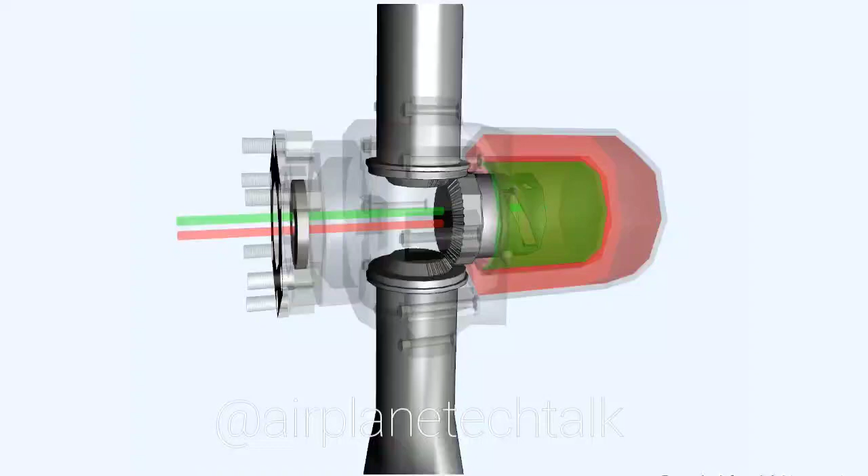One type of double-acting mechanism used on larger propellers, like the one shown here, achieves control of blade pitch angle by means of a hydraulically actuated piston connected to a cam slot, which rotates a bevel gear. The bevel gear engages with and drives other bevel gears located at the butt of each blade. Oil flow to either side of the piston is controlled by a propeller control unit.

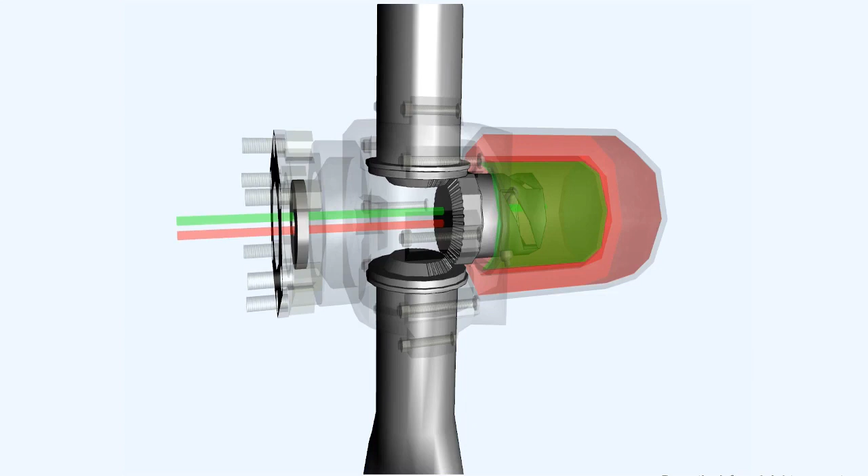Alternatively, the type of control system shown here has a similar pitch change mechanism to the single-acting propeller. Like the single-acting propeller, its pitch change mechanism is also mounted towards the front of the hub, and the cylinder also contains a hydraulic piston. However, in the double-acting system, this piston will have hydraulic pressure directed to either side of it.

Fine pitch oil is sent to one side of the piston, or coarse pitch oil is sent to the other. This eliminates the need for coarse pitch springs or gas pressure, and, with the exception of some larger propellers, the assistance of centrifugal counterweights.

The double-acting propeller's controller will respond to the various demands made by the pilot regarding the propeller RPM to control the oil flow to either side of the piston in the pitch change cylinder in three ways.

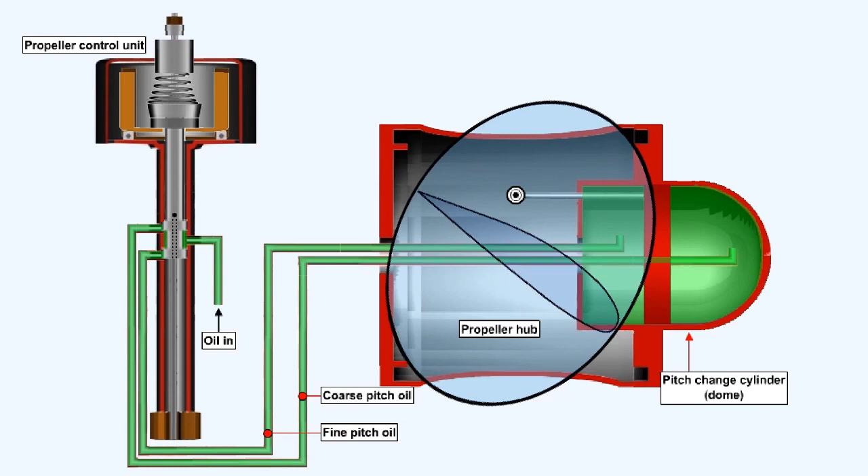If the propeller is underspeeding, then the flyweights will be leaning inwards because of the reduced centrifugal force, allowing the speeder spring to push the pilot valve downwards. This will allow the unit to supply oil to fine off the pitch of the propeller, while simultaneously porting coarse oil to return. The piston will move to fine off the blades, causing an RPM increase.

If the RPM is as required, in other words the propeller is on speed, then a hydraulic lock is formed which traps oil both sides of the piston, maintaining the blade pitch constant.

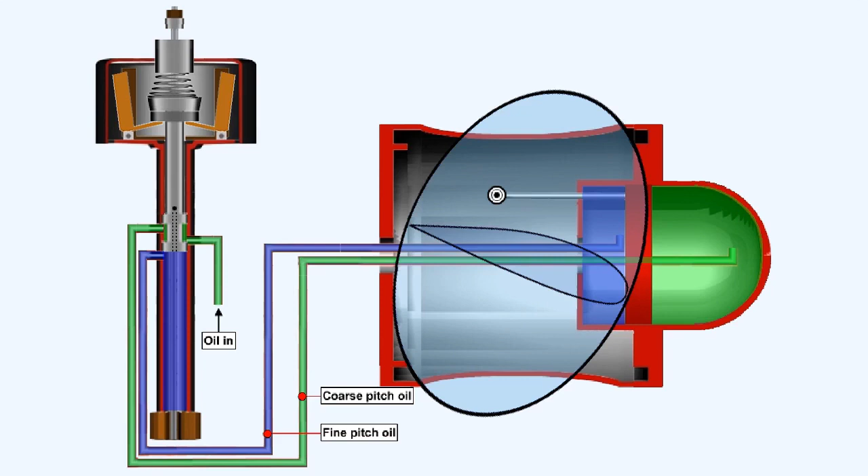If the propeller is overspeeding, then the flyweights will be forced outwards by centrifugal force, compressing the speeder spring and allowing the pilot valve to move upwards. This will simultaneously allow coarse oil to be ported to one side of the piston and fine oil to drain back into the engine from the other side. The piston will move to coarsen the blade pitch, causing a decrease in RPM.

A constant speed propeller must be capable of all the pitch change operations mentioned previously, as they are selected by the pilot moving the RPM lever in the cockpit. The system must also be capable of maintaining a selected RPM within its own operational limits, regardless of changes in airspeed, altitude, and engine power setting.

When the constant speed unit senses that the RPM is as has been selected, the system remains in a static state. However, any change in airspeed, altitude, or engine power setting will result in a tendency to either increase RPM above or decrease RPM below the value selected.

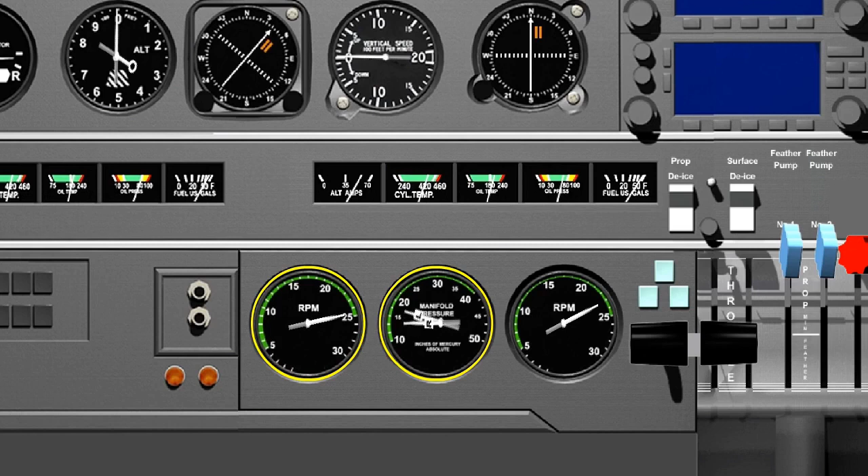As we've seen already, a tendency for RPM to increase, an overspeed condition, will be countered by a supply of oil being fed to the coarse pitch side of the piston in the pitch change mechanism. As is shown in this animation, the pitch will then coarsen and propeller torque will rise as a result of the increase in the blade angle of attack. Propeller torque now exceeds the engine torque and will cause the RPM to decrease back to the selected setting.

As the RPM regains its previously selected value, the movement of the pilot valve in the constant speed unit, which directed the oil flow in the first place, is progressively reversed until it regains the sensitive position, where a hydraulic lock holds the position in the pitch change mechanism immovable until the next RPM selection or disturbance in airspeed, altitude, or engine power setting.

A tendency for the RPM to reduce, which is termed a propeller underspeed condition, must be countered by a supply of oil being fed to the fine pitch side of the piston in the pitch change mechanism.

As shown in this animation, the pitch will fine off and propeller torque will fall as a result of the decrease in the blade angle of attack. Propeller torque is now less than the engine torque and will cause RPM to increase back to the selected setting.

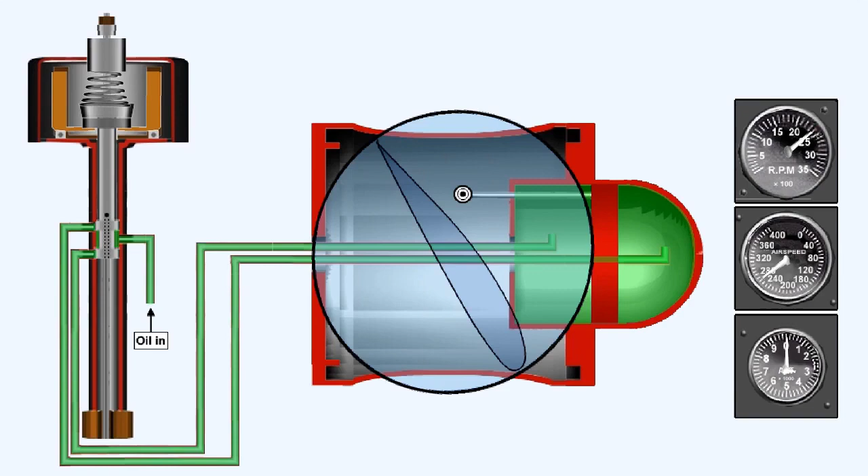Should an engine fail in flight, its propeller control unit would sense a drop in RPM, and, in an attempt to maintain the pilot's selected RPM level, would move to the underspeed or fine pitch position. Centrifugal moments acting on the blade would cause it to rotate towards fine pitch.

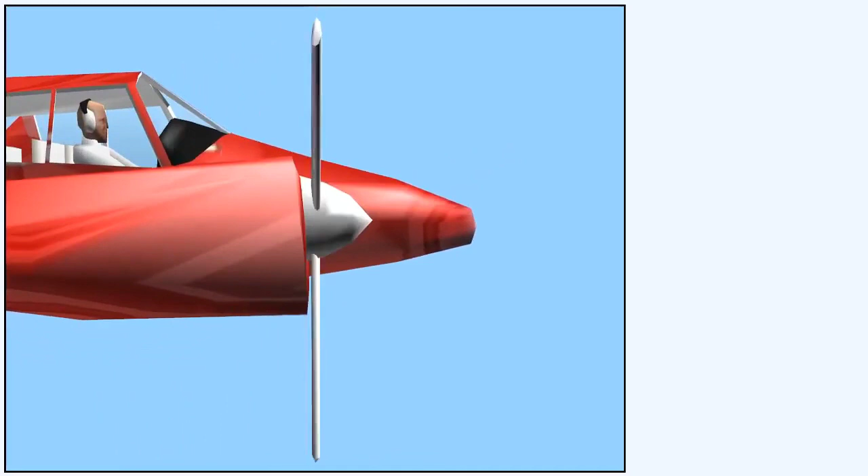This would result in the propeller being put into a windmilling situation, with its pitch change piston abutting the fine pitch stop. The immediate result of this would be a very large asymmetric drag, which would yaw the aircraft violently towards the failed engine.

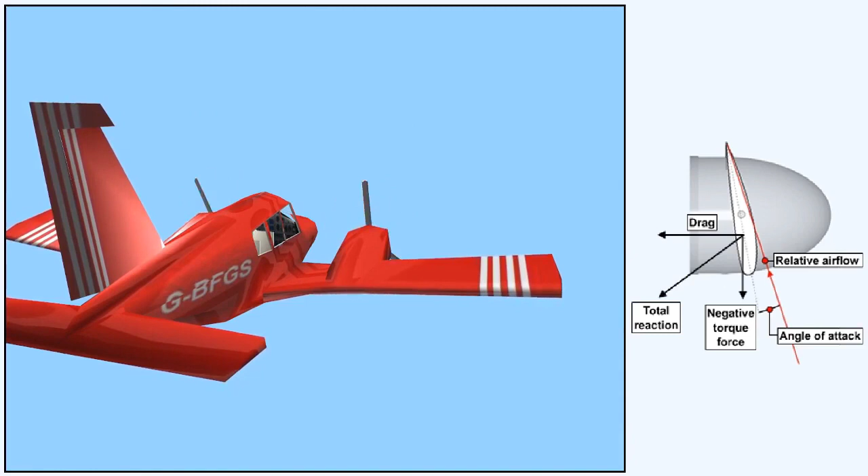A second possibility, if the propeller continued to windmill and drive the engine, could be a complete mechanical breakdown of the engine, and even an engine fire.

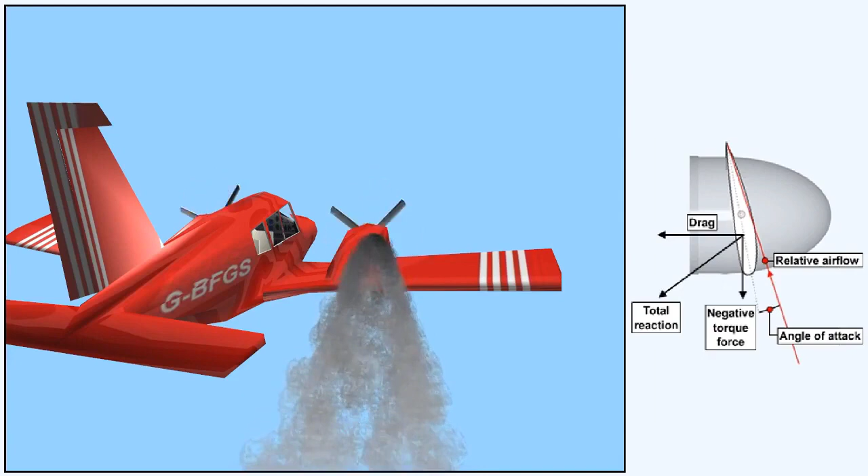So, to minimize drag, and also to prevent further possible damage to the engine and the aircraft, some propellers, particularly on multi-engine aircraft, are provided with a means of turning the blades edge-on to the air flowing over them. In this edge-on position, where no aerodynamic force is generated either forwards or backwards, the propeller will cease to rotate. This action is called feathering the propeller.

If the engine had actually failed, there would be no requirement to unfeather its propeller. However, propeller manufacturers usually provide an unfeathering facility, by means of which, if appropriate, an engine restart may be attempted. This may be a requirement following asymmetric flight practice.

The operating principle of the propeller control unit incorporated in a feathering propeller is similar to that previously discussed, in that the unit contains an oil pump to boost oil pressure delivered from the engine or reduction gearbox, and a hydromechanical governor for RPM control. There is, however, the addition of a feathering mechanism, the operation of which will be discussed progressively throughout the lesson.

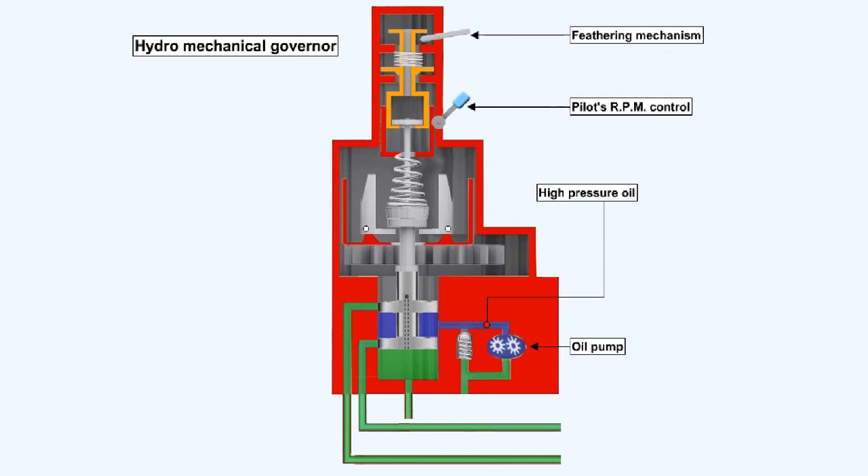Control units with feathering mechanisms may be found on both turboprop or reciprocating aero engines. Dependent on the manufacturer and type of propeller system, the controller may be known as a propeller governor, a constant speed unit, CSU, or a propeller control unit, PCU. For the remainder of this lesson, we'll refer to the unit as the propeller control unit, or PCU.

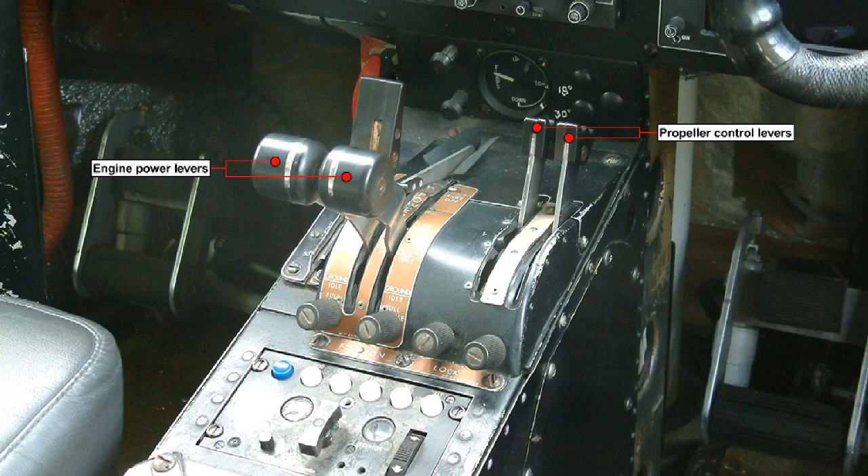The controls available to the pilot are, again, dependent on type. Most spark ignition piston engines, and many turboprop engines, are equipped with a twin-lever cockpit arrangement, whereby the pilot has separate engine power and propeller control levers. In this arrangement, propeller feathering can be manually achieved by moving the propeller control lever to the feather position, or on some aircraft, by means of a separate feather lever.

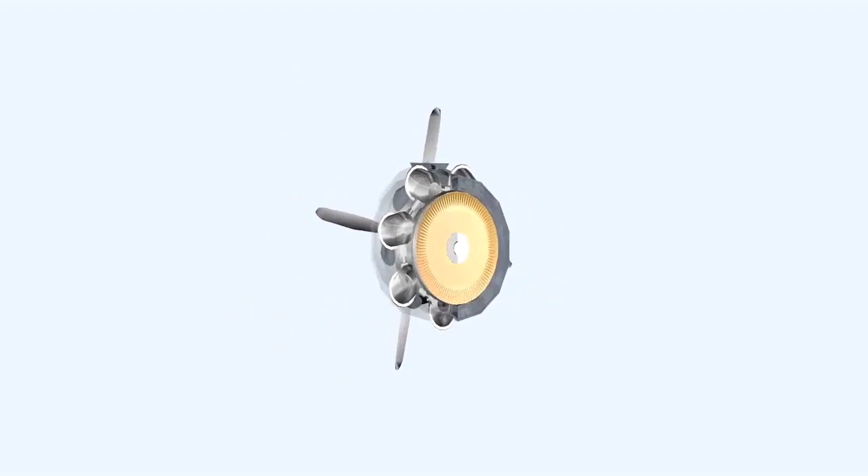Some turboprop engines utilize a single lever arrangement, whereby the pilot is provided with a power lever only. In this arrangement, propeller pitch, RPM, and engine fuel flow, power, are simultaneously adjusted. Feathering may be achieved by moving the engine high-pressure fuel cock to the feather position.

New generation reciprocating engines equipped with Full Authority Digital Engine Control, or FADEC, also use a single lever arrangement, whereby the pilot selects the required power setting and the propeller pitch angle is controlled either electronically by an electronic engine control unit or by a hydromechanical control unit.

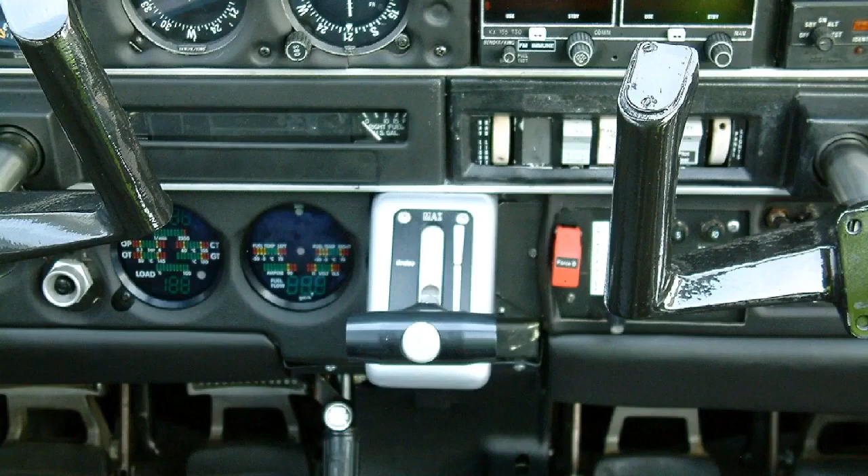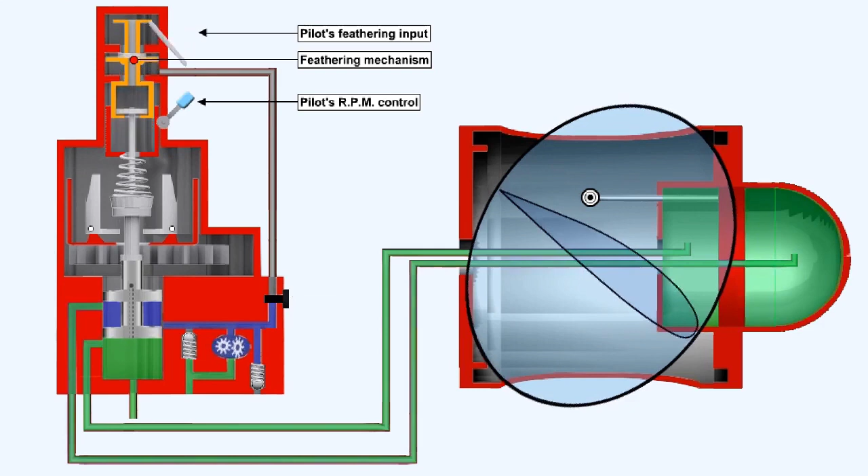This diagram illustrates that the propeller control unit may contain a number of components which are additional to the basic constant speed system that we discussed earlier. The feathering mechanism provides a means of manually lifting the pilot valve to the overspeed or coarse pitch condition when the appropriate control is moved to the feather position.

The actions required to feather a propeller are dependent on the type of engine and propeller combination and the type of aircraft they are installed in.

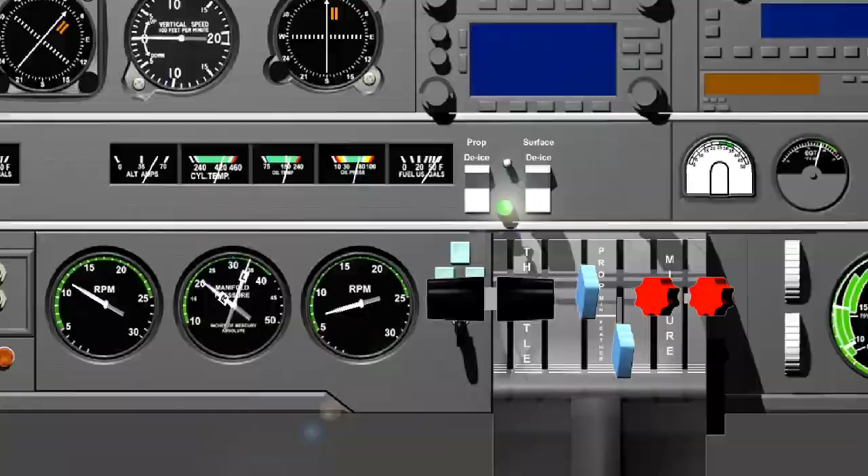For single-acting propellers, this normally involves moving the propeller condition lever, or RPM lever, to the feather position. Moving the appropriate lever to the feather position mechanically lifts the landed valve against the speeder spring to its highest position, thereby simulating an exaggerated overspeed condition. The landed valve will remain in this position until the feathering control is moved back to its normal position. Any oil in the pitch change cylinder can now drain away, allowing the spring or gas pressure, assisted by counterweights, to move the piston onto the feathering stop.

To unfeather the propeller, the speeder spring tension is released by moving the propeller control lever to a position comparable to that of the serviceable engine, which of course is running at normal operating RPM. This moves the landed valve down and connects the reserve oil pressure line to the fine pitch side of the propeller pitch change cylinder.

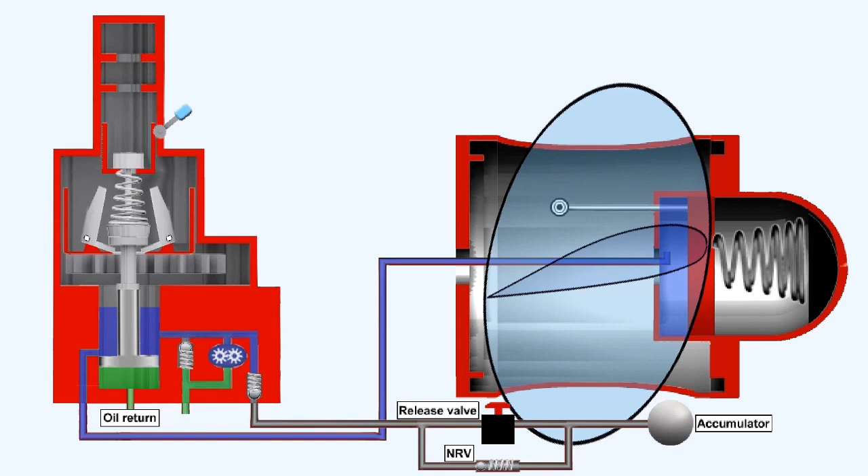A reserve of oil pressure may be supplied by means of an accumulator, which is charged continuously during normal operation. By activating a release valve, oil pressure from the accumulator is directed to move the pitch change piston to fine pitch.

Alternatively, some systems may utilize an electrically operated unfeathering pump, or, on some smaller systems, the engine may require motoring over on the starter to build up sufficient oil pressure.

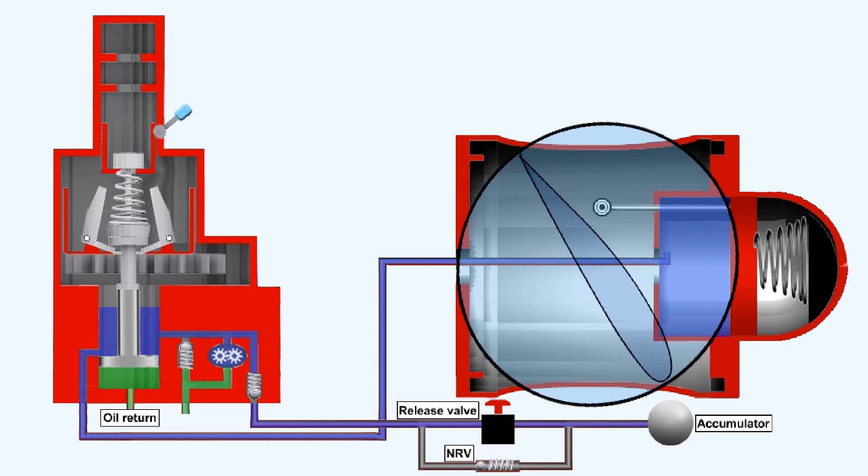Once the propeller blades have moved away from the feathered position, the propeller will start to windmill, and as long as the engine has fuel and ignition, it should start.

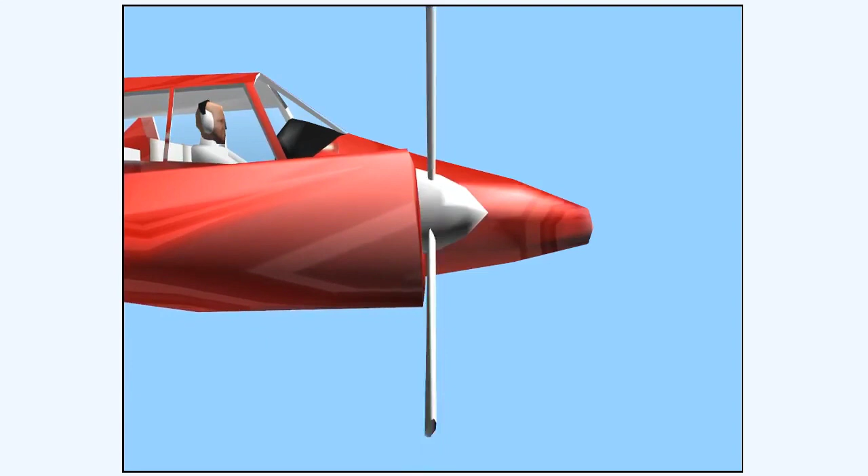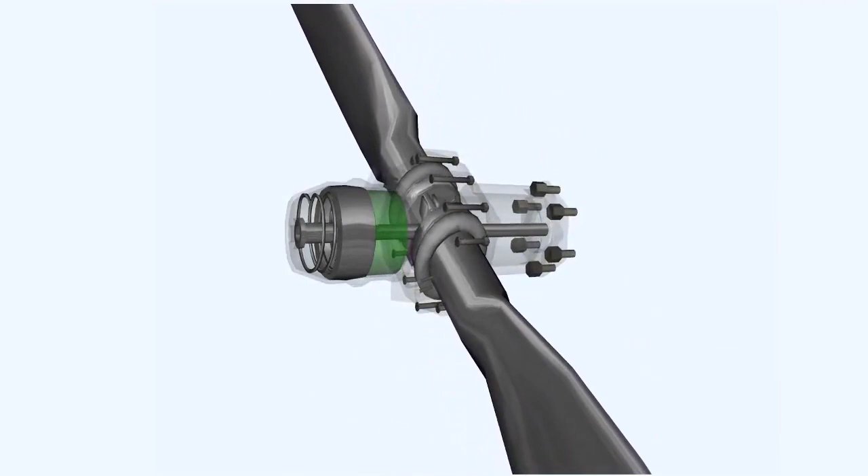When an engine fitted with a single acting propeller is shut down after flight, the propeller should be at the fully fine pitch position. There is a considerable quantity of oil trapped under pressure on the fine pitch side of the piston in the pitch change cylinder, which is holding the propeller in the fully fine position. This oil pressure is being opposed by the force of the feathering spring.

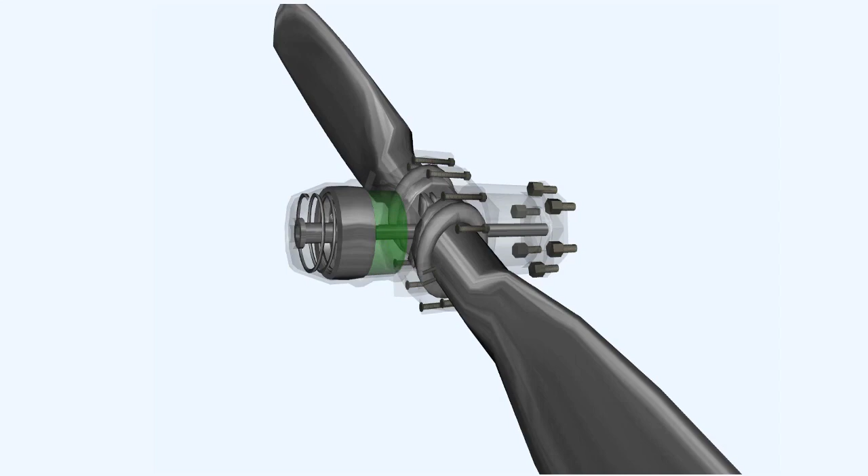After engine shutdown, the trapped pressure will gradually leak away past the landed valve in the constant speed unit. As this trapped hydraulic pressure leaks away, the feathering spring is able to slowly push the propeller blades towards the fully feathered position.

While this condition would be acceptable to a turboprop with a free power turbine, it would result in an unacceptably high loading on the starter motor of a piston engine or direct coupled turboprop. So, to prevent the feathering spring pushing the blades all the way to the feathered position, on those engines where a feathered propeller would cause stress on startup, centrifugal latch pins are incorporated in the pitch change mechanism.

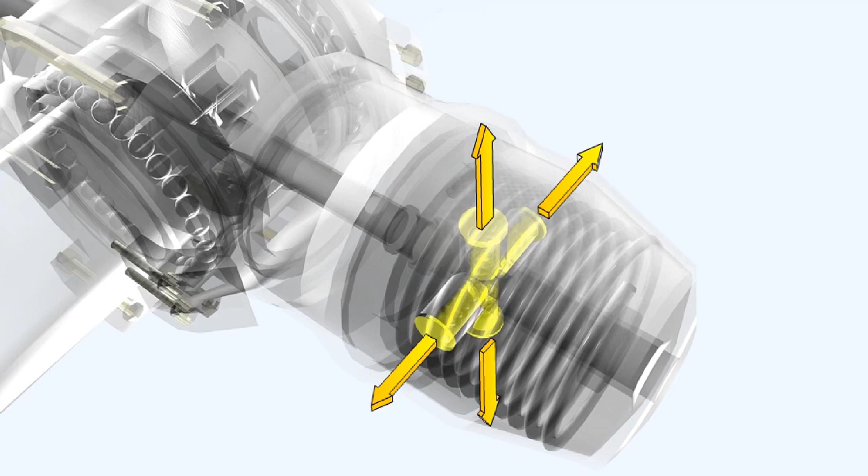The latch pins are held disengaged by centrifugal force while the engine is running. As the engine RPM reduces, small springs behind the latch pins overcome centrifugal force, and they are allowed into contact with the piston mechanism. Typically, the value of the RPM at which the latch pins become engaged is around 650 to 700.

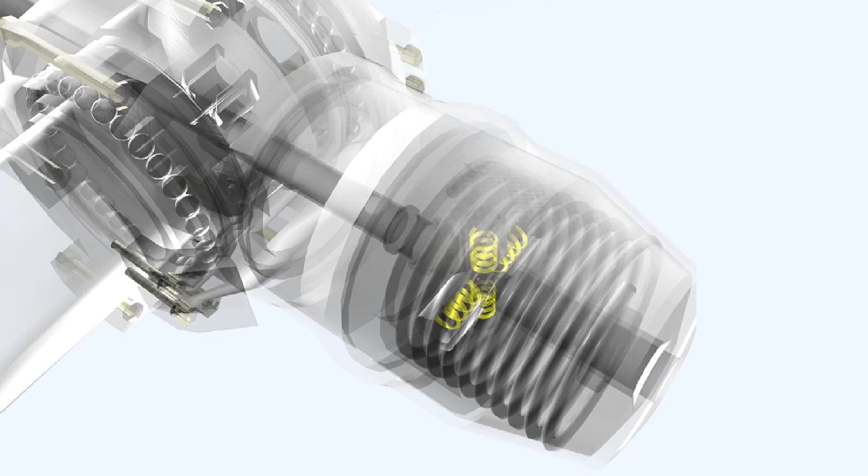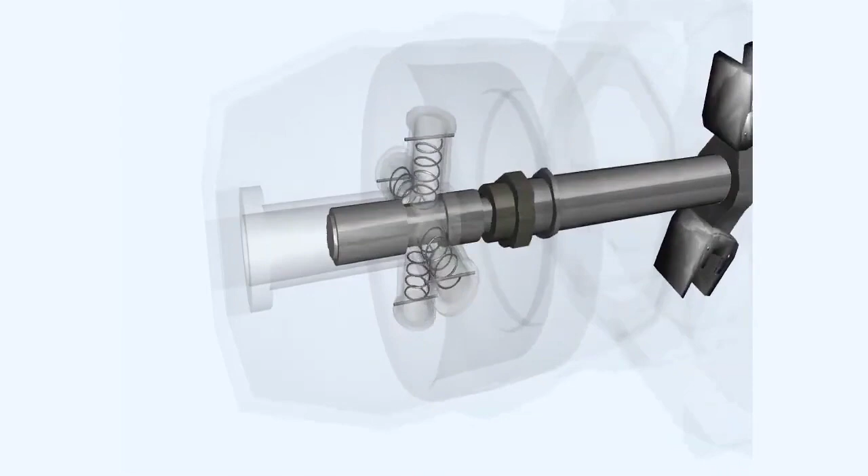After engine shutdown, the latch pins engage with a groove in the piston mechanism, which locks the piston. This prevents it from being pushed beyond a predetermined blade angle, and further into the feathered position by the feathering spring. When the engine is started and RPM increases, centrifugal force will disengage the latch pins. Fine pitch oil will quickly build up and hold the propeller against the fine pitch stop.

Note that if a propeller engine combination does have a centrifugal latch mechanism fitted, it may become impossible to feather the propeller of that engine once its RPM has fallen below the latch setting value. This is because once they are engaged, the latch pins can prevent the piston being moved any further by the feathering spring. It is thus extremely important to complete the feathering drill before the RPM decays.